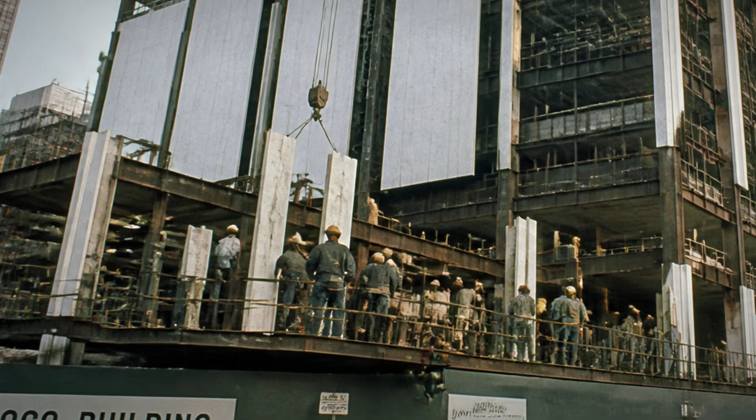500-pound slabs of marble, breaking free from the face of Chicago's tallest skyscraper, and falling toward one of the busiest pedestrian corridors in America. The building was a billion-dollar 83-story tower sheathed in 43,000 panels of white Carrara marble, the same stone Michelangelo once carved. When it opened in 1973, it was a triumph. By the late 1980s, it was a crisis. The eventual fix cost $80 million.

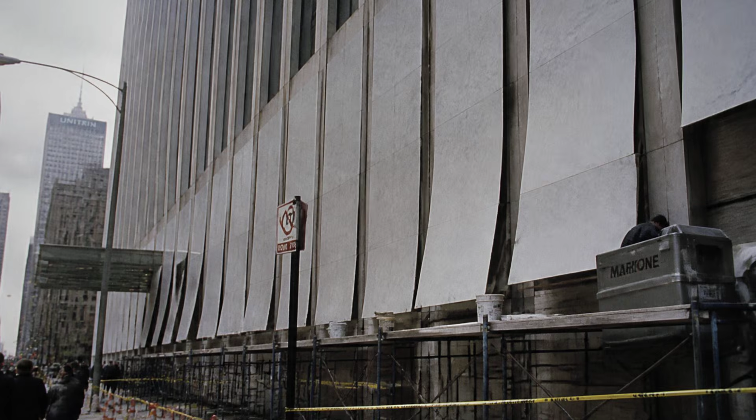But the warnings about this exact failure existed before a single panel was ever installed. This was not an unforeseeable accident. It was a deliberate gamble. On Randolph Street, just steps from Millennium Park, the daily rush of office workers and tourists was shadowed by a silent threat. The marble cladding of Chicago's tallest tower had begun to fail, not with a single dramatic collapse, but with the unpredictable violence of gravity and time.

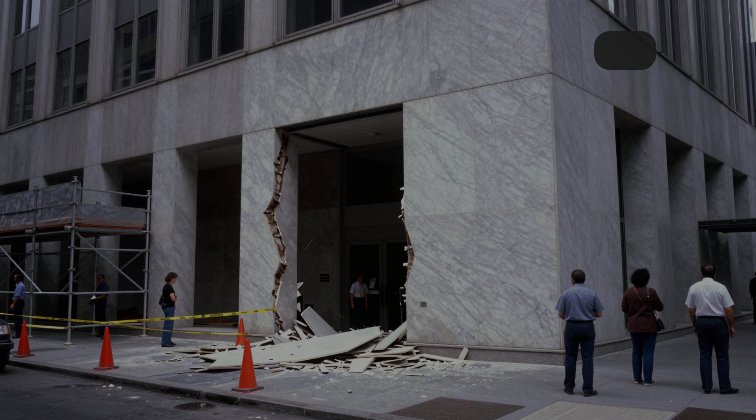Police logs from the late 1980s record emergency calls. A thunderous crash. White stone shattered across the pavement. Crowds frozen in disbelief. One incident involved a marble panel weighing nearly 500 pounds breaking loose and plummeting to the street below. The force could crush a car or end a life in an instant.

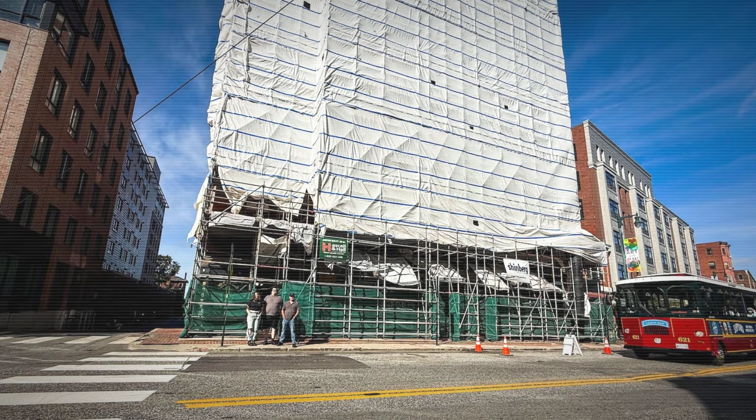City officials scrambled to contain the danger. Barricades went up along the base of the building. Uniformed patrols and building engineers paced the sidewalks, eyes trained upward, radios crackling with updates. Temporary tunnels of heavy scaffolding shielded pedestrians from the risk overhead, but the sense of unease lingered. Randolph Street was no quiet back alley. It was a main artery, lined with shops, restaurants, and bus stops, drawing thousands of people every day.

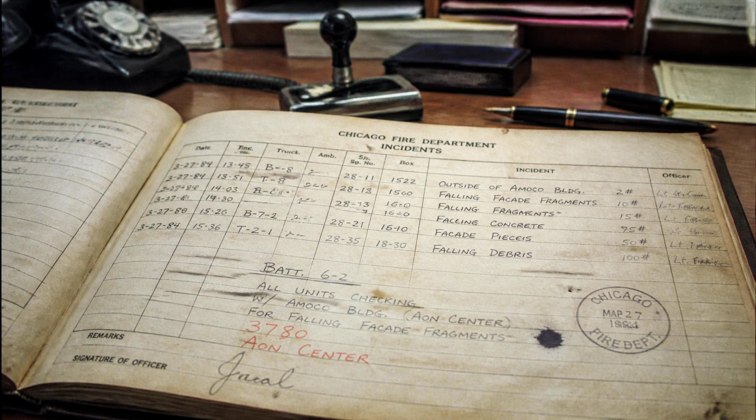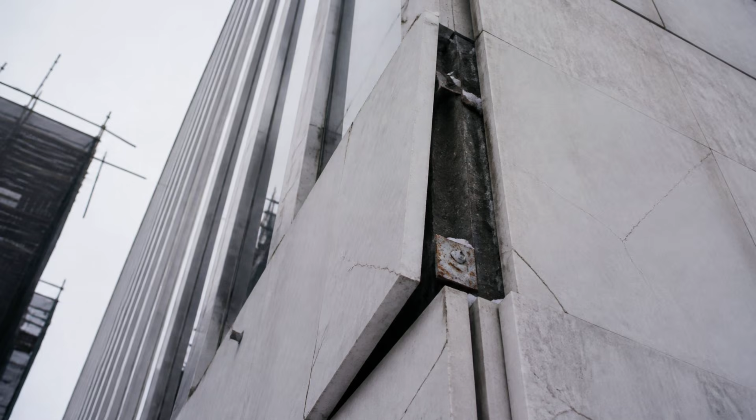The marble panels, each one large enough to blanket a dining table, had seemed like a symbol of permanence when the building opened. Now, their thinness and fragility turned them into projectiles. Police and fire departments kept records of every falling fragment, some weighing hundreds of pounds, others splintering into sharp shards that littered the sidewalk. Emergency notices warned of potential closures, and city engineers debated whether the next piece would fall without warning. Every shift, workers and passers-by moved through a corridor of uncertainty, never sure if the next sound from above might be the start of another disaster.

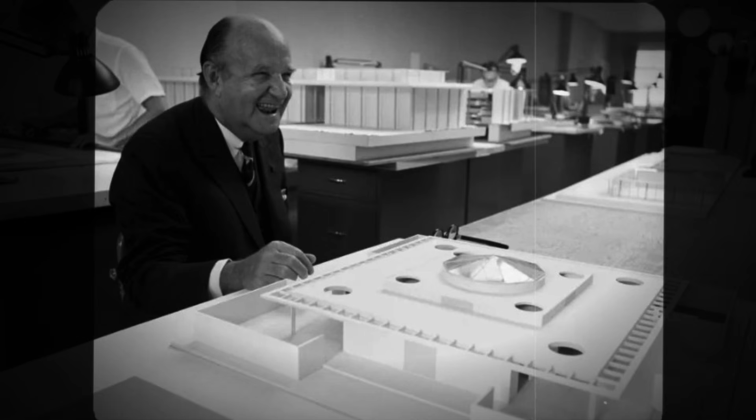The city's response was urgent, but the question remained, how could a billion-dollar skyscraper become such a hazard? The answer lay not in chance, but in choices made decades earlier. In 1973, a new giant joined Chicago's skyline. The Standard Oil Building, later known as the Amoco Building, rose 1,136 feet above the city, instantly claiming the title of Chicago's tallest skyscraper. Its opening was splashed across the business pages and architectural journals, celebrated as a triumph of modern engineering and corporate ambition.

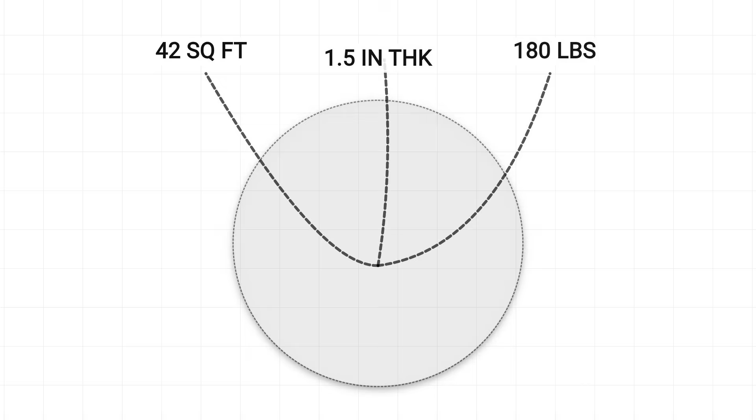The tower's most striking feature was its skin. Nearly 43,000 gleaming white panels of Carrara marble, quarried from the same Italian hills that once supplied Michelangelo. The effect was dazzling. A monolithic luminous shaft that stood out even among Chicago's boldest buildings. Behind the marble, however, was a story of image and intent. The choice of stone was no accident. Edward Durell Stone, the building's lead architect, insisted on Carrara marble to set a tone of permanence and prestige.

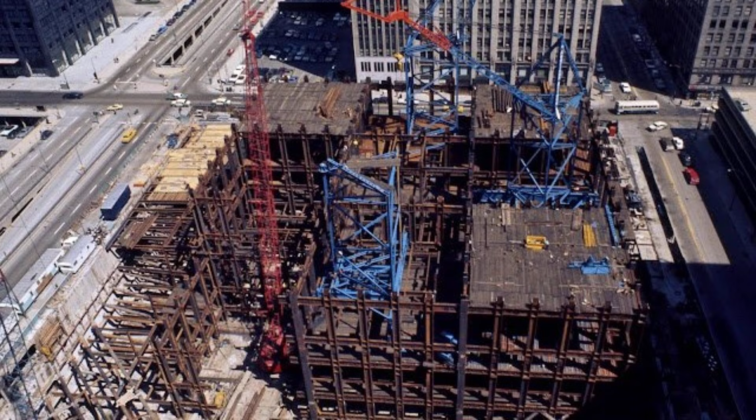For the executives at Standard Oil of Indiana, the marble facade was more than decoration. It was a public statement. In an era when corporations vied for attention with ever taller, ever sleeker towers, this building would be their monument, white, immaculate, and unmistakable against the city's darker, older blocks.

But the marble was unusually thin, just 1.25 inches thick, almost 40% slimmer than what most engineers then considered safe for a high-rise. The gamble was justified as a way to save weight and cost. Stone himself once described the marble as no more expensive than crumpled-up aluminum. The engineering team, under pressure to deliver the architect's vision, signed off on the unconventional specification. In the excitement of the debut, few questioned whether the marble could stand up to Chicago's brutal winters or the daily battering of wind off Lake Michigan.

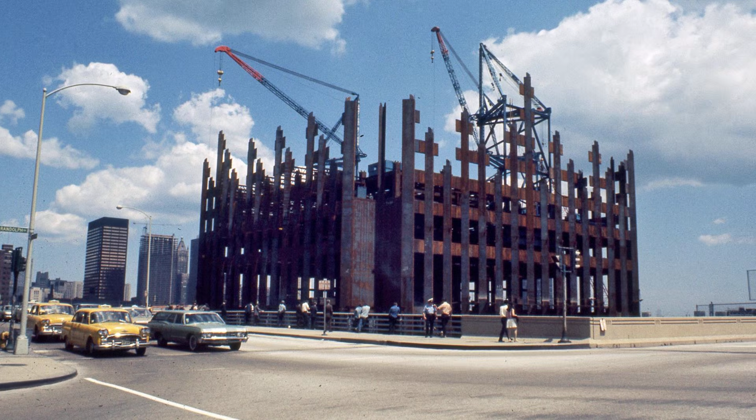For a brief moment, the building was the talk of the city. Its white marble sparkled in the sun, and its height redefined the skyline. Yet beneath the acclaim, the seeds of a future crisis were already set in stone, literally, by the very decisions that made the tower famous. The decision to sheath Chicago's tallest tower in a 1¼ inch Carrara marble was a bold move, one that set it apart from every other skyscraper in the city.

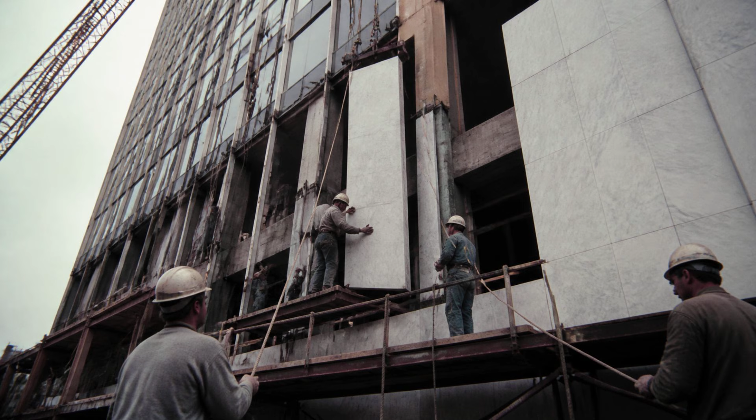Most high-rise architects in the early 1970s specified stone panels at least 2 inches thick, a standard built on decades of experience with wind, weather, and the relentless cycle of freezing and thawing. But here, the marble was nearly 40% thinner. The gamble was justified in design memos by 2 arguments: weight savings and cost.

With each panel weighing around 275 pounds instead of 400 pounds, the building's steel structure could be lighter, foundations could be slimmer, and the total construction budget could be trimmed. In a city famous for its engineering, the numbers carried weight. Edward Durell Stone, the architect behind the project, described the marble as no more expensive than crumpled-up aluminum.

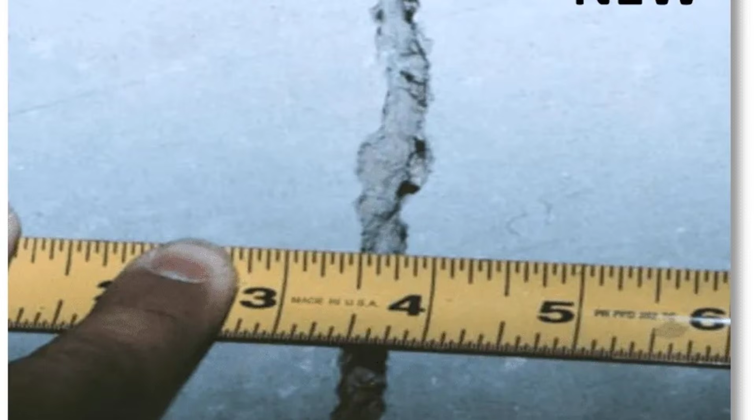It was an eye-catching boast, meant to reassure both the client and the public that beauty did not have to come at a premium. The thinner panels made the facade look sleek, almost impossibly smooth for a building of this scale. But the real price of that elegance was hidden in the details buried in technical reports and quietly debated among engineers. Design documents from the period show that the choice was not just about style. The 1 1/4 inch thickness was selected to keep the building's dead load within limits, allowing for a more slender frame and a savings on steel and concrete.

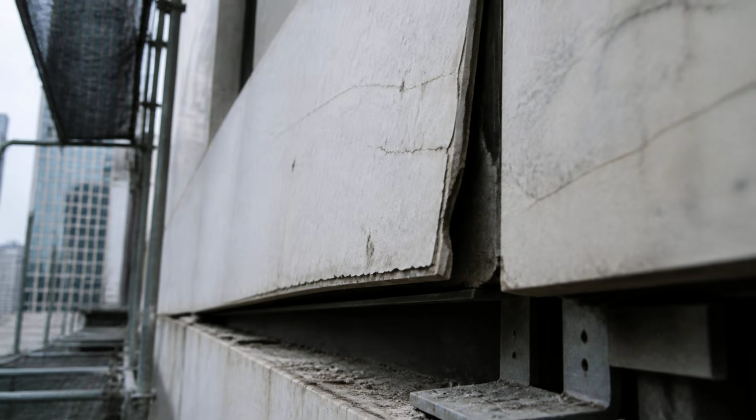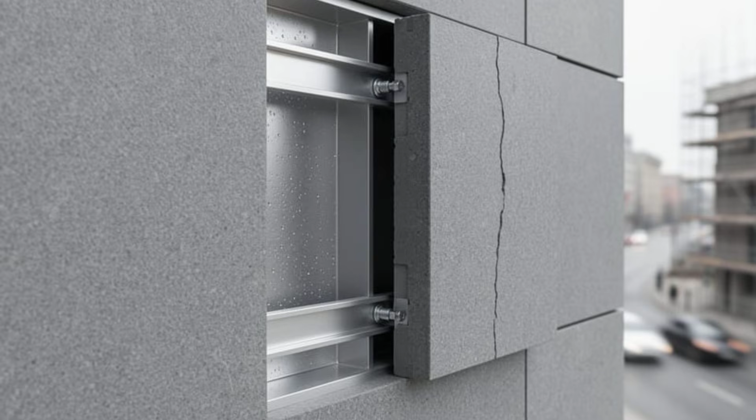Industry standards of the time, however, were clear. Marble used as exterior cladding on skyscrapers needed to be thicker to withstand the forces of nature. The thinner panels were more vulnerable to bowing and cracking, especially in a climate like Chicago's, where temperatures could swing by 30 degrees in a single day. The marble's beauty was undeniable, but its strength was a calculated risk. In the excitement of unveiling a new architectural landmark, the warning signs were easy to overlook. The decision to go thin was locked in, shaping not just the building's appearance, but its fate.

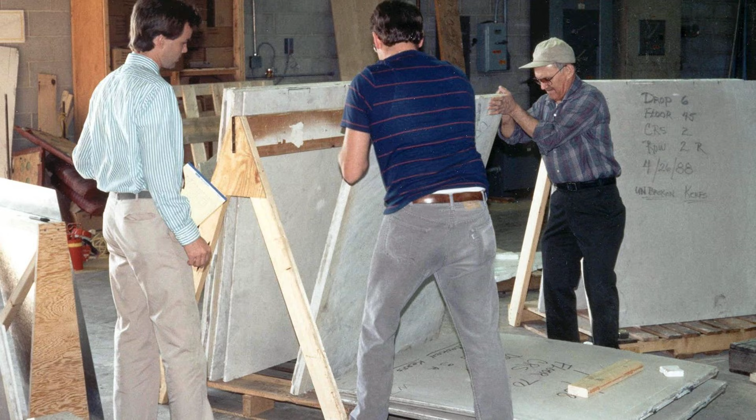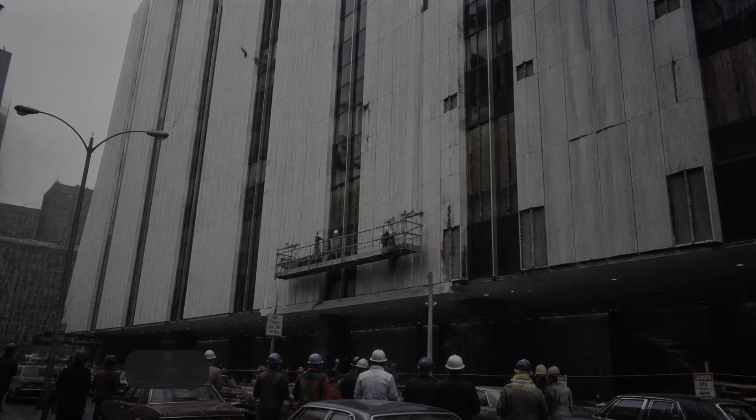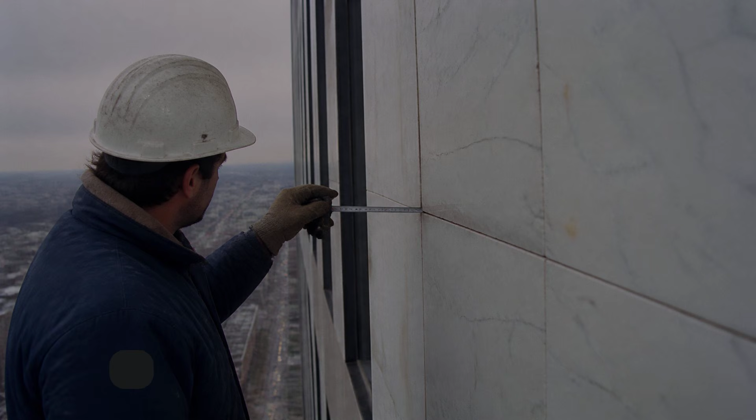In 1988, a team from Wiss Janney Elstner Associates, known in the engineering world as WJE, arrived on site with a mandate that went beyond routine maintenance. Their inspection logs from that year read less like a checklist and more like a catalog of distress. Hundreds of marble panels were showing visible signs of trouble: bowing, surface cracks, and in some cases a subtle but unmistakable bulge that hinted at forces working deep within the stone. The team documented panels with bellies up to 1 inch, a deformation impossible to ignore on a structure that soared over 1,000 feet above the city.

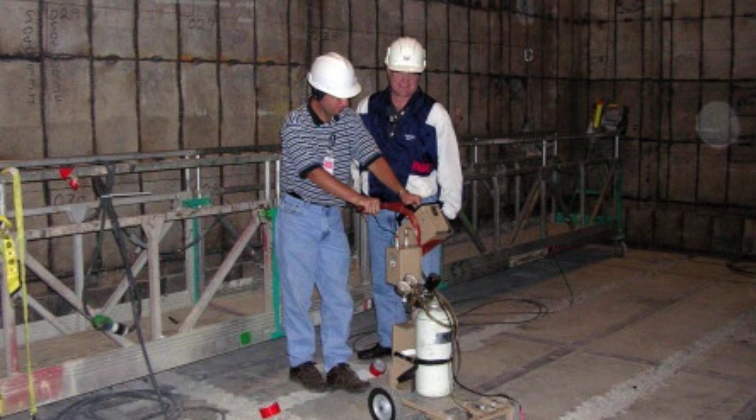Photographic evidence collected during this investigation captured the reality behind the architectural gloss. Close-ups revealed hairline fractures radiating from anchor points, faint at first but spreading further each winter. Some panels had warped so much that their edges no longer sat flush against the steel frame. The cumulative effect was alarming. It was not just a handful of isolated failures. By 1988, the damage was widespread, affecting hundreds of panels across multiple elevations, especially on the wind-battered southeast face.

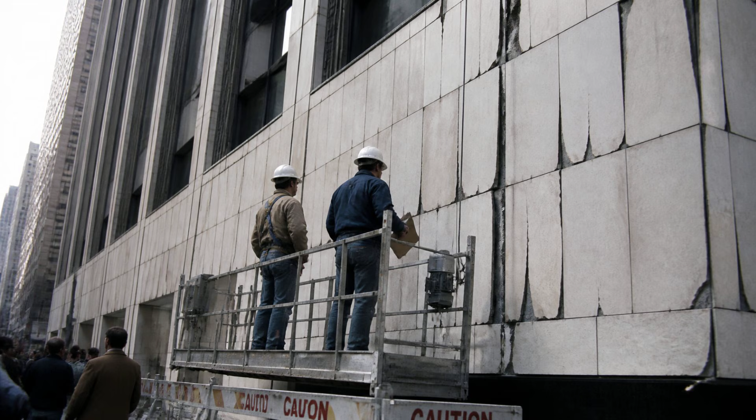Inspection teams traced the distress to more than just the visible cracks. They measured the curvature of the marble, cataloged discoloration, and logged every panel that had lost its original rigidity. The findings forced a reckoning. What had once been dismissed as superficial weathering now appeared as a systemic breakdown, one that could not be solved by patchwork repairs or temporary straps. The 1988 inspection marked a turning point. The evidence was undeniable, and the question was no longer whether the marble was failing, but how, and how quickly the crisis would escalate.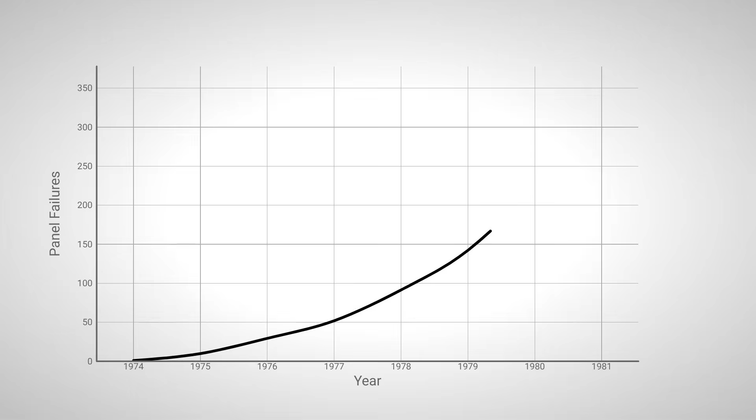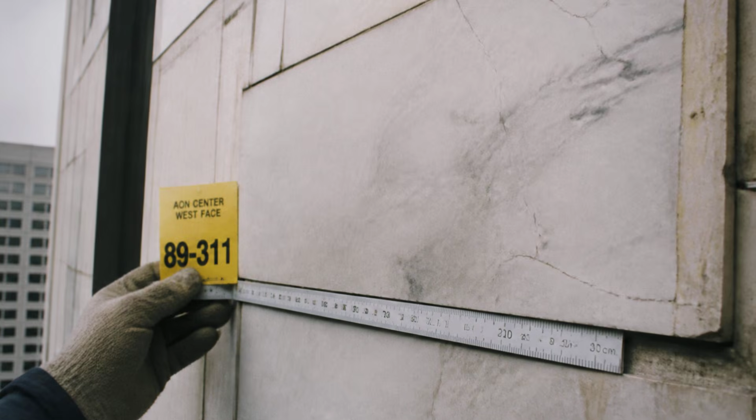Thermal hysteresis became the marble's silent undoing. In the language of engineers, it describes the way a material bends and warps with each cycle of heating and cooling, never quite returning to its original shape. For the Aon Center's thin Carrara panels, Chicago's climate delivered this punishment day after day. Sunlight would warm the marble, causing it to expand. By night, the temperature dropped sharply, and the stone contracted. Water seeped into microscopic pores, froze, and then expanded, driving new cracks deeper into the marble's structure.

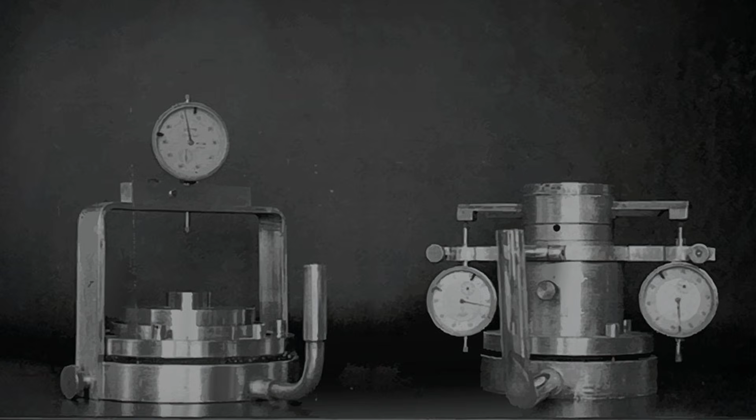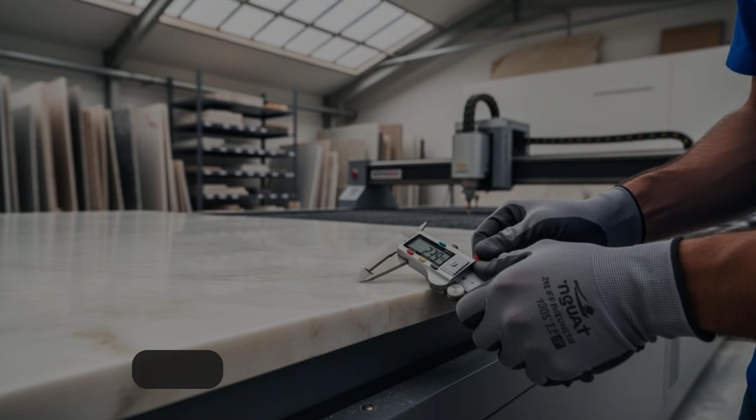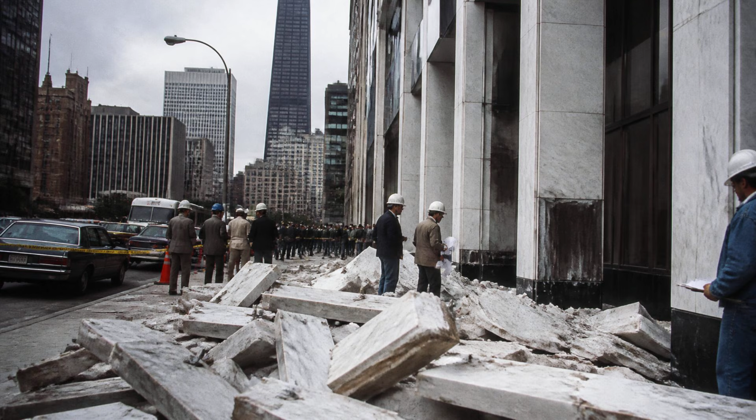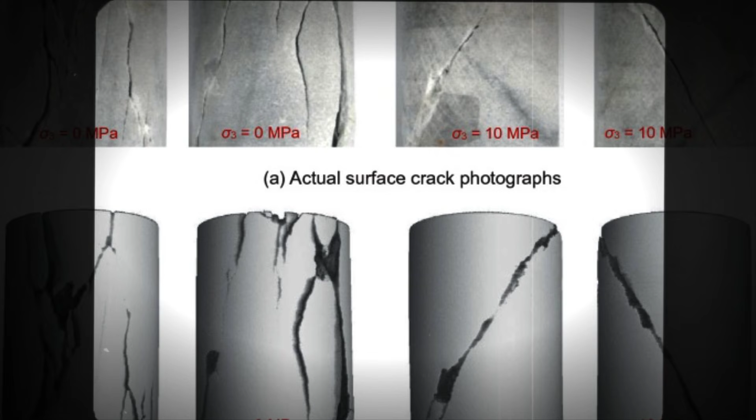Laboratory tests commissioned in the late 1980s told a grim story. The marble had lost up to 40% of its original flexural strength. That is not a surface blemish. It is a fundamental collapse of the stone's ability to bear its own weight. The panels, once rigid, now bowed outward by as much as 1 inch. Some had lost even more strength in the years since installation, with projections showing further decline was inevitable. The phenomenon was irreversible. Once the internal bonds in the marble had broken down, no repair could restore them. The process did not just make the panels unsightly or uneven, it rendered them brittle, unpredictable, and dangerous.

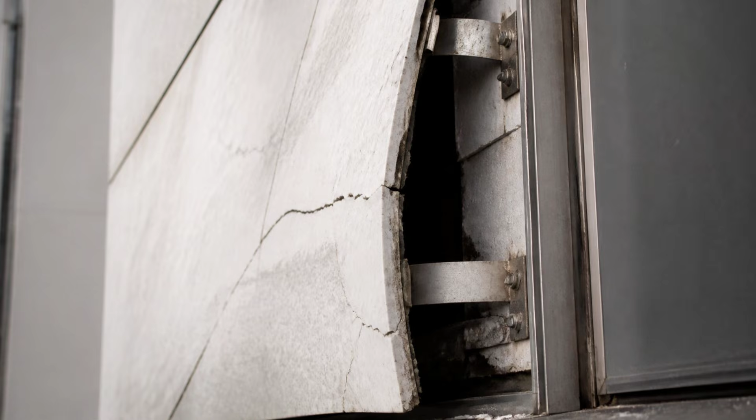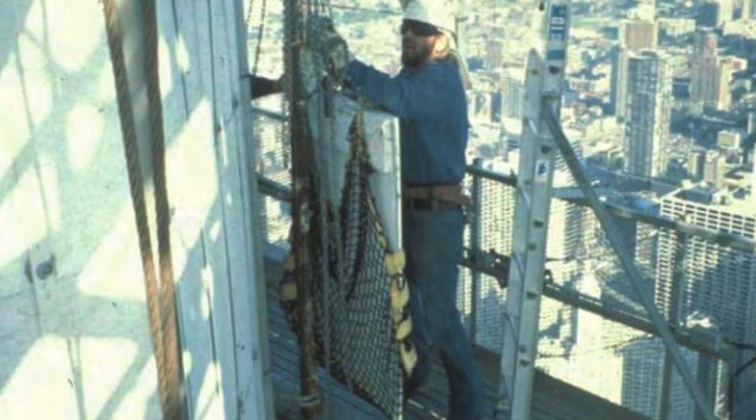A facade engineer brought in to diagnose the failure described the marble as permanently deformed. The panels' anchors, designed for a tight fit, now struggled to grip a stone that had warped beyond their reach. Even the best designed straps and braces could only buy time. The data was clear. Patching cracks or strapping panels would not reverse the damage. With a 40% loss in strength and the relentless cycle of thermal hysteresis at work, the only option left was to replace every slab. The building's skin had reached a point of no return, not because of an accident, but because the science of material fatigue had been ignored in favor of aesthetics and cost savings.

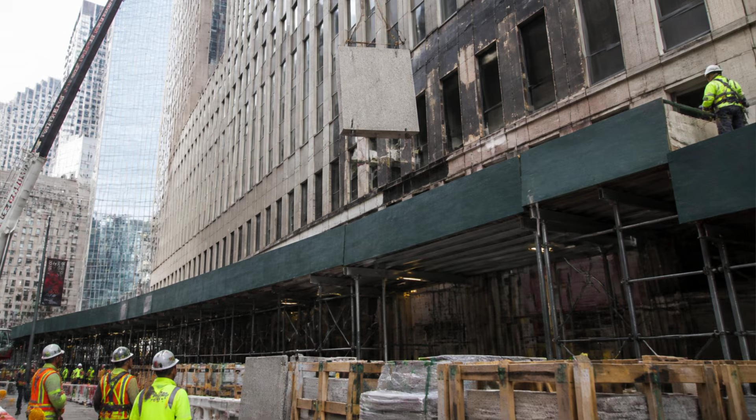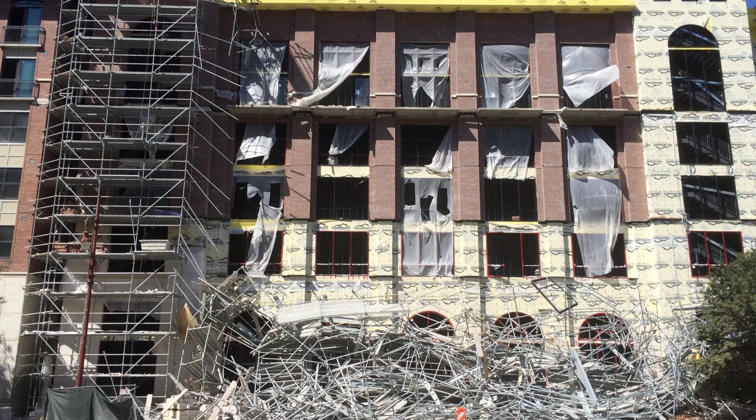The reckoning arrived in the form of a single staggering figure: $80 million. That was the price tag Amoco's board approved for the only solution left: stripping the entire tower and recladding it with stone that could withstand Chicago's climate. The decision was not made lightly. Internal memos and contract documents show weeks of debate over costs, liability, and the logistics of replacing 43,000 panels on a building that never closed its doors. But the evidence was overwhelming. Temporary straps and scaffolding could no longer guarantee safety. The marble's internal structure was too far gone.

At the heart of the process stood Shelby Pierce, Amoco's facilities manager. Tasked with overseeing the crisis, Pierce described the situation as a nightmare for any building operator. You don't get to choose the weather, but you do have to answer for the stone.

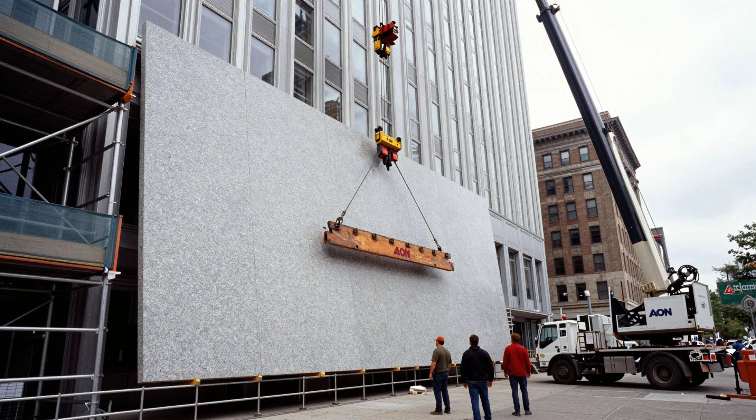The board's final vote authorized a full reclad, and with it, a material change that would define the tower's next chapter. Carrara marble was out. In its place, the team selected Mount Airy granite, quarried in North Carolina, a stone known for its strength, density, and proven durability on high-rises. Each new panel would be 2 inches thick, far heavier and more robust than the failed marble.

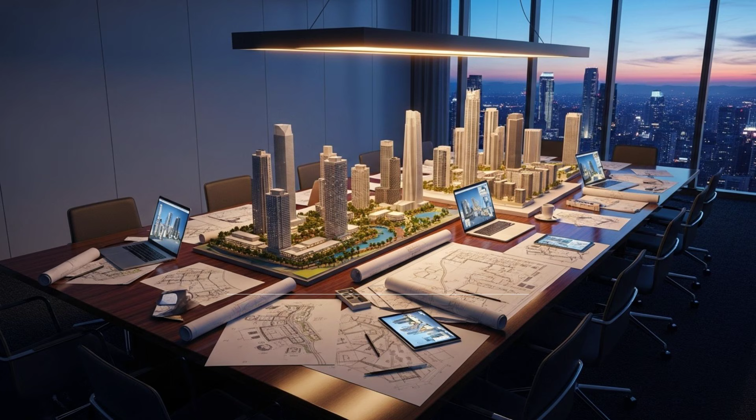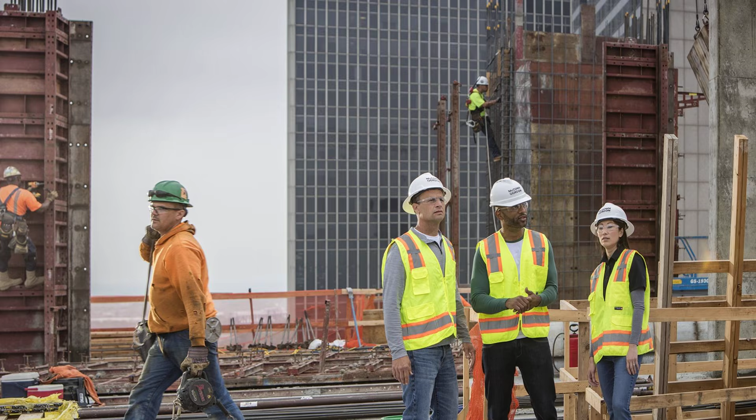The contract, valued at approximately $80 million, covered not just the granite, but also the engineering, labor, and safety measures required to keep the building occupied during construction. The approval set in motion one of the largest facade replacement projects ever attempted on an occupied skyscraper. From that moment, there was no turning back.

The building's iconic white skin would be peeled away, panel by panel, and replaced with granite designed to last. The financial commitment was enormous, but the alternative, a city block at risk every winter, was no longer acceptable.

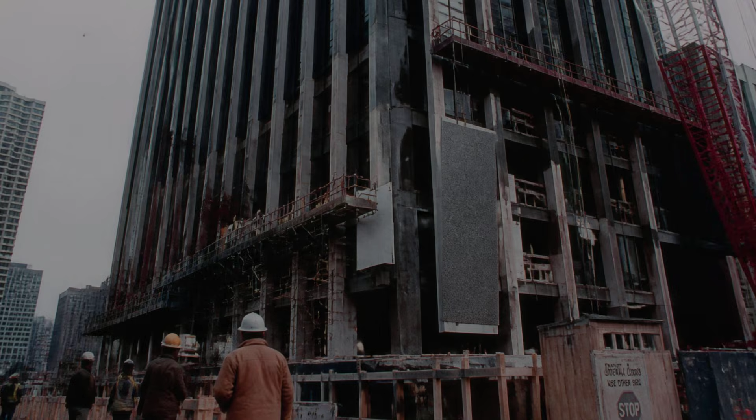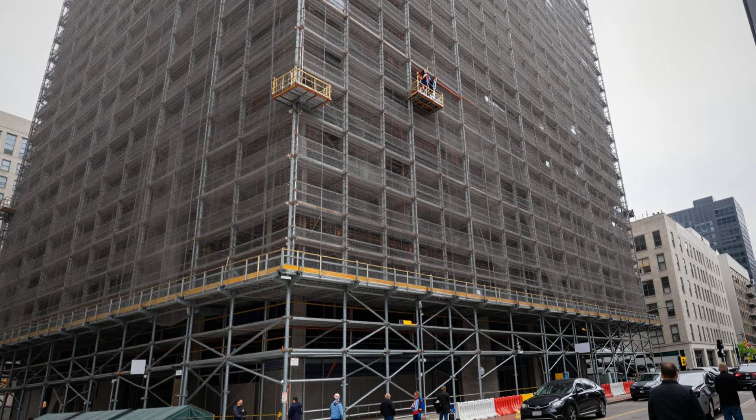Replacing the skin of an 83-story skyscraper, while it remained fully occupied, called for a construction effort on a scale rarely attempted. Crews faced the task of removing and replacing 43,000 marble panels, each one weighing hundreds of pounds, without disrupting the daily life of thousands of workers inside. To keep the building operational and the streets below safe, engineers designed a system of steel scaffolding that wrapped the entire tower like a cocoon.

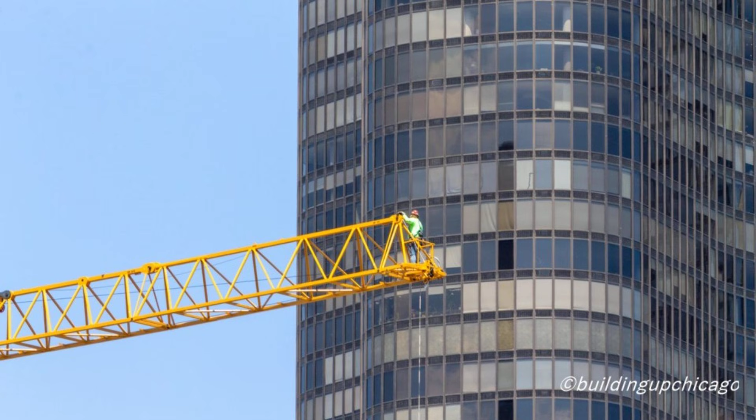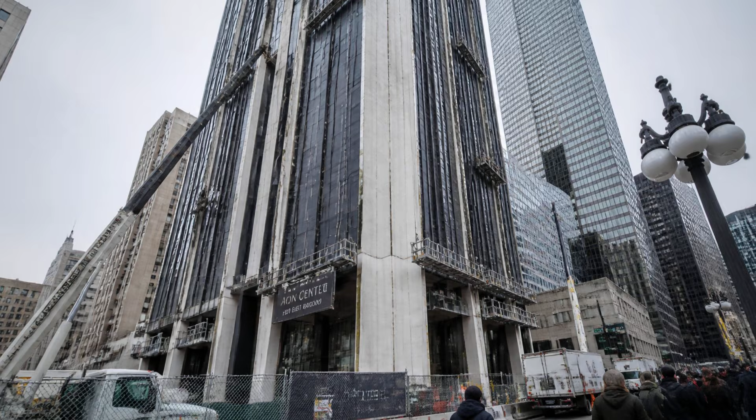High-capacity cranes, anchored to the roof and the neighboring structures, hoisted new granite panels up the sheer face of the building while lowering the failed marble slabs back down to ground level for disposal. Each panel had to be detached, maneuvered through narrow staging areas, and swapped out with precision, floor by floor, from street level to the 83rd story.

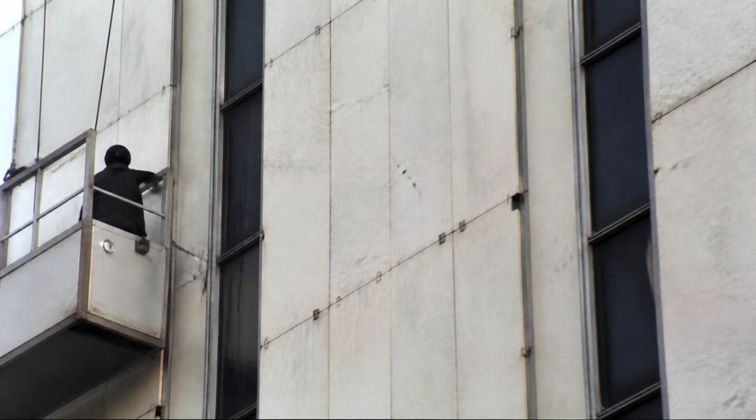The logistics demanded round-the-clock coordination, deliveries scheduled to the minute, wind speeds monitored before every lift, and safety harnesses checked for every worker at height. The entire operation unfolded above one of Chicago's busiest downtown corridors, a living demonstration of what it takes to undo a design gamble written in stone.

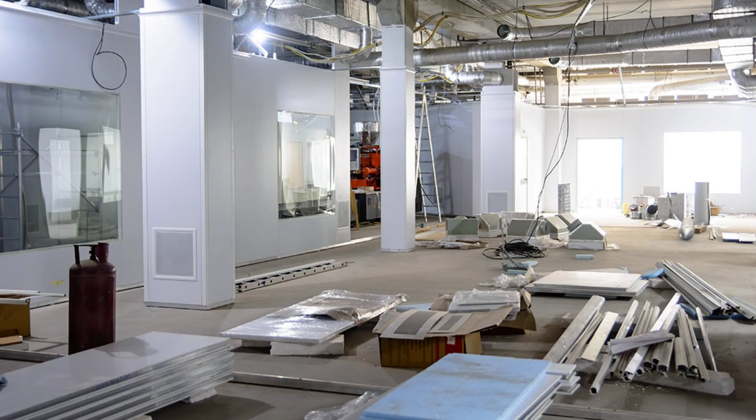Randolph Street's transformation from a bustling thoroughfare into a construction zone left a mark on daily life that numbers alone can't capture. Steel tunnels and sidewalk sheds stretched for blocks, forcing pedestrians to navigate narrow, dim corridors beneath the shadow of the tower. For shop owners and restaurant managers along the street, every day behind the barricades meant fewer customers and quieter registers. Merchant Association surveys from the early 1990s recorded a drop in weekly sales of 10 to 15% during periods of street closure, a blow felt most acutely by small businesses already operating on thin margins.

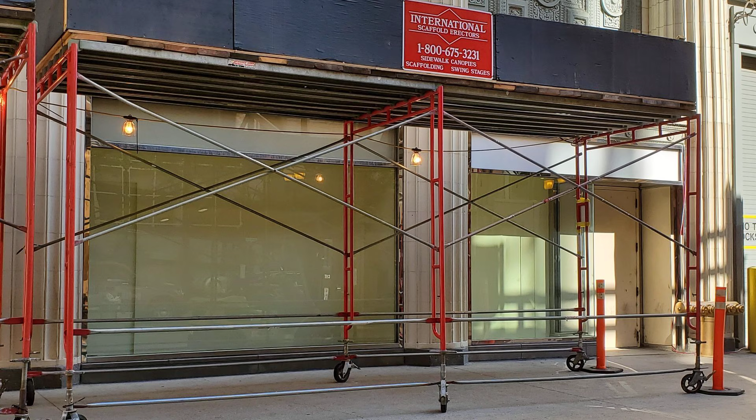City records show that permits for sidewalk and lane closures stretched across several months, with some sections of Randolph Street blocked off entirely, while crews worked overhead. The constant hum of construction, dust in the air, and a sense of unease about falling debris drove foot traffic away. These disruptions didn't just inconvenience passers-by, they reshaped the economic rhythm of the block, turning a design failure high above into a daily hardship for those at street level.

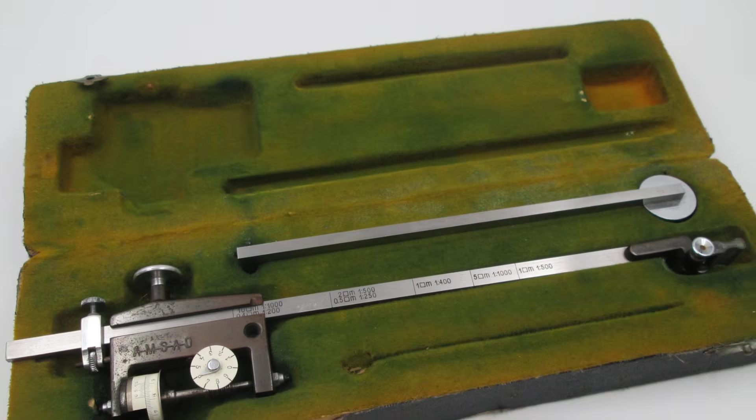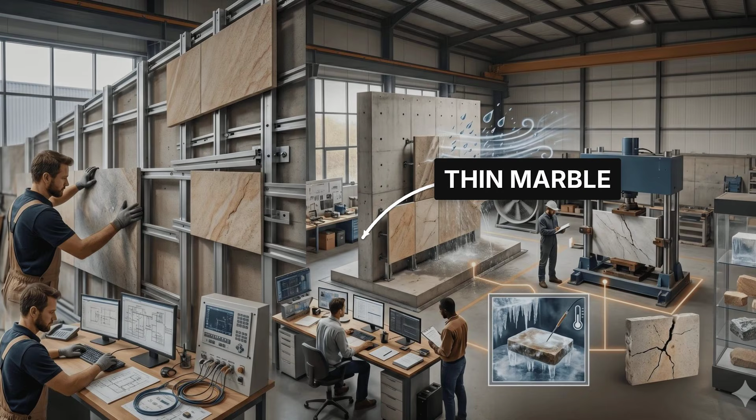Warnings about the risks of thin marble were present in the engineering world long before the first panel ever left Carrara. Technical journals and professional guidelines in the late 1960s described how a stone less than 2 inches thick could bow and fracture under repeated temperature swings. Yet no internal memo or meeting record from the building's design team has ever surfaced to show that these concerns were formally raised or heeded during planning. The decision to proceed with 1¼ inch marble was locked in, shaped by aesthetic ambition and cost calculations, rather than by the full weight of material science.

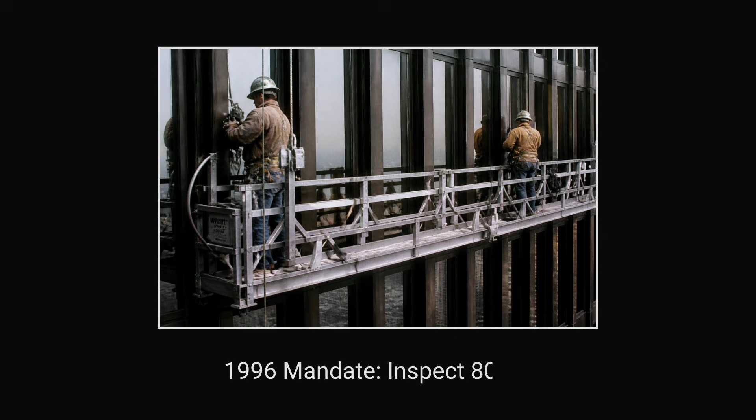When disaster became undeniable, the consequences stretched far beyond a single building. The city's regulators and building officials, faced with the fallout on Randolph Street, began to question whether Chicago's inspection rules were strong enough to prevent future failures. In 1996, the city adopted the Facade Inspection Ordinance, requiring every building over 80 feet tall to undergo regular hands-on exterior checks by licensed engineers or architects.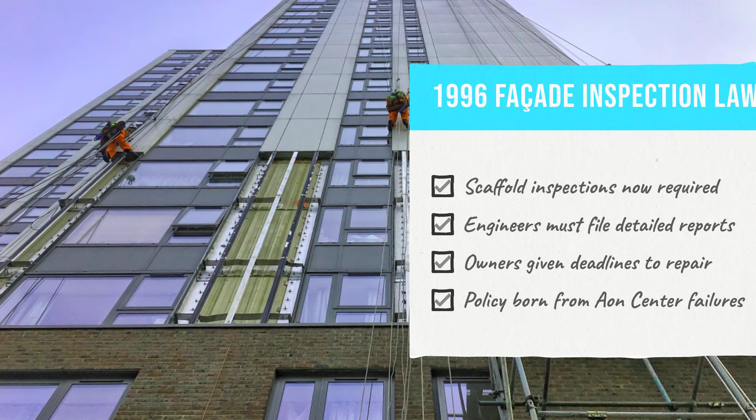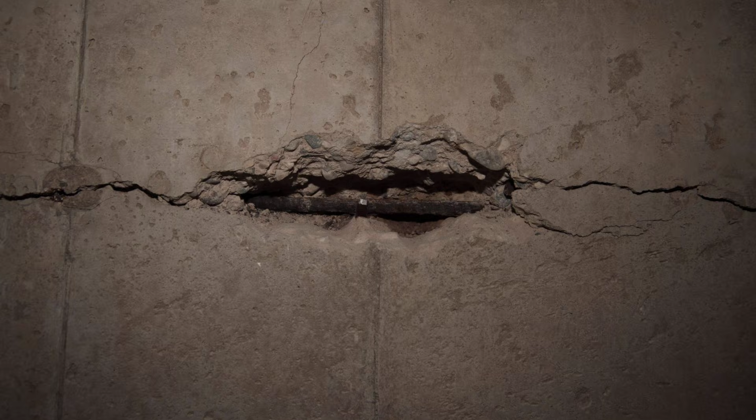The new rules mandated scaffold-based inspections, formal reporting, and repair programs, measures designed to catch hidden dangers before they could threaten the public. The Aon Center's marble crisis became a touchstone for code reform, a reminder that shortcuts in design can have consequences measured not just in dollars, but in lives and city policy. The story stands as a caution. Architecture's boldest visions demand respect for the limits of the materials that bring them to life.

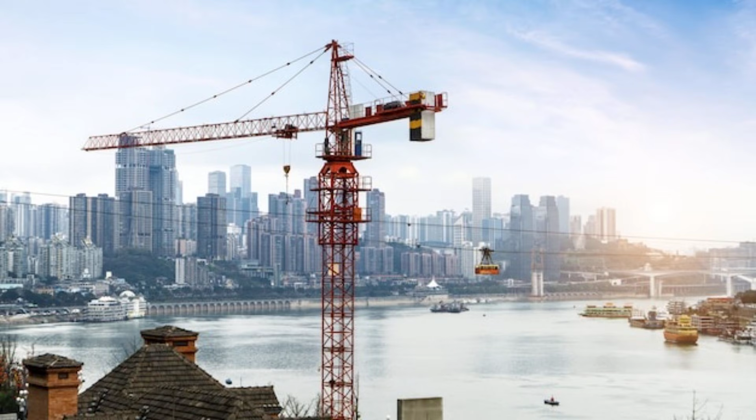Today, every high-rise in Chicago faces mandatory facade inspections, a direct legacy of this calculated risk. The Aon Center's crisis wasn't an accident. It was a warning. As cities reach higher and materials push limits, every shortcut in design becomes a public safety bet. The true cost isn't just measured in dollars, but in trust, earned or lost, one decision at a time.